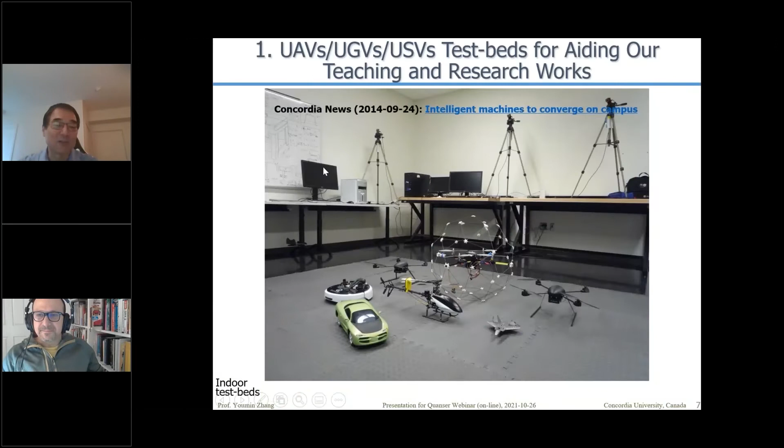Thanks for the opportunity for this webinar to share our work with the cutting edge platform supported by Quanser for many years since I joined Concordia in the beginning of 2007. The idea today is to show what we have done through this cutting edge platform for helping or aiding the teaching and research work carried out by our group, and I really appreciate the great support from the Quanser team for many years of support.

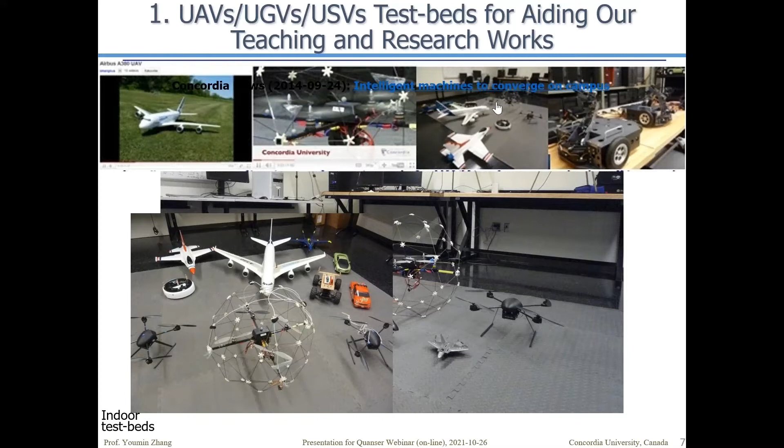We have had these since the birth of the QBall, QBot and UGV. And now we also have the QDrones, different platforms in our research lab, including the MicroPilot MP2128 autopilot. We try to make use of all these cutting-edge platforms to help us do cutting-edge research, hopefully.

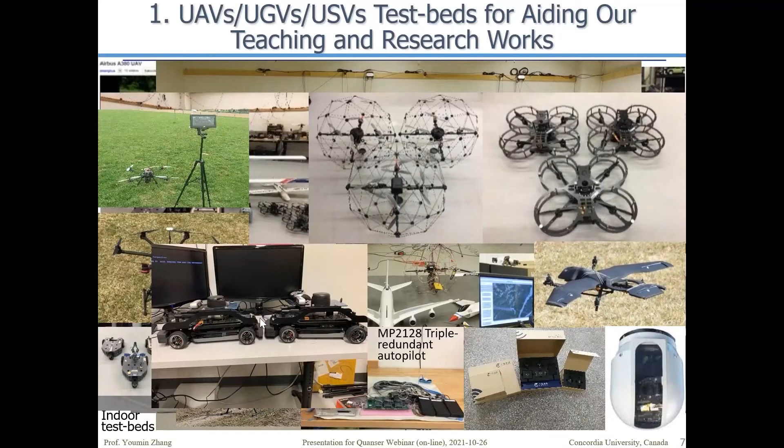This is the latest one from Quanser, called QCar. We have two, thanks to Quanser, and use this cutting-edge platform for research currently. Here is also our outdoor test bed, the DJI M300 with onboard cameras, including color cameras and infrared cameras. We are trying to use this for forest fire monitoring applications.

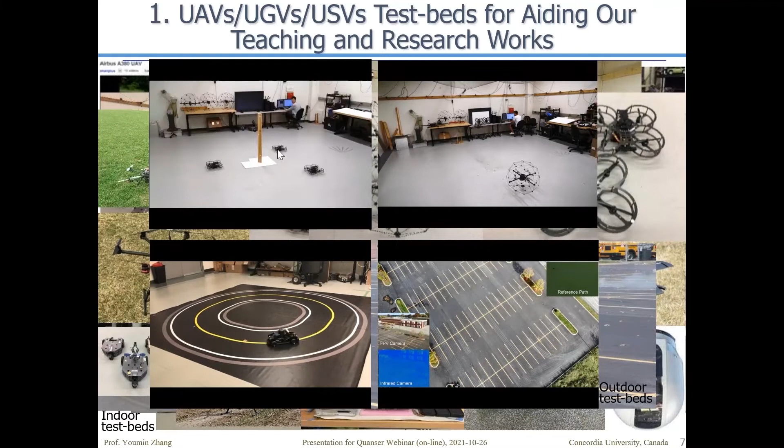For a quick view, I'll show some videos of what we have done recently, to give a rough view of how we use this cutting-edge platform to help us do research on applications for forest fire monitoring. As you can see in the upper one, we have the QBall, the QDrone, and the QCar.

This is the application with the M300, Matrice 300, with onboard sensors, mimicking fire detection, which includes both the motion control and the image processing, using the latest deep learning methods and AI techniques to help us achieve that goal.

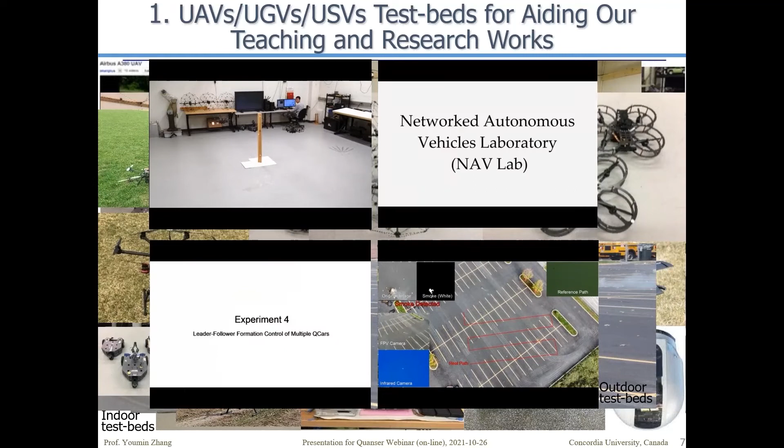You can see these testing scenarios, where we use all these technical platforms. We have three QBalls, and on the floor you can also see the UGV, so there are different platforms available. We currently also use this for leader-follower multiple vehicle formation control applications in general.

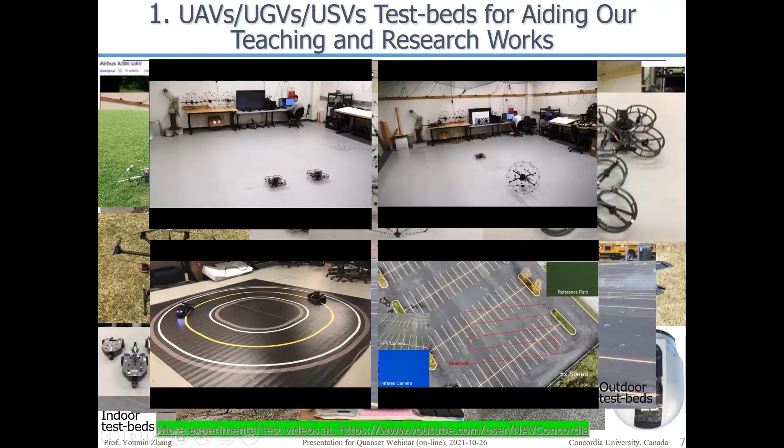And so just to show quickly, for these scenarios that I showed we have done. But anyway, if you're interested in more testing scenarios, you can come to this website, which we call the NAV Lab for Concordia, the Networked Autonomous Vehicle Laboratory in Concordia. Actually, we have all these videos uploaded for more than 10 years. As you can see, the first one we uploaded more than 10 years ago, with this test platform initially from Qbot, to try to implement different strategies for this fault-tolerant control algorithm behind.

So there are more videos. Once we have done videos, we upload them on this YouTube channel. If you're interested, you can watch all these videos. Probably I do not have time to show all these videos here. So maybe I can show these videos here. As you can see, yeah. Probably you cannot hear the voice, but anyway.

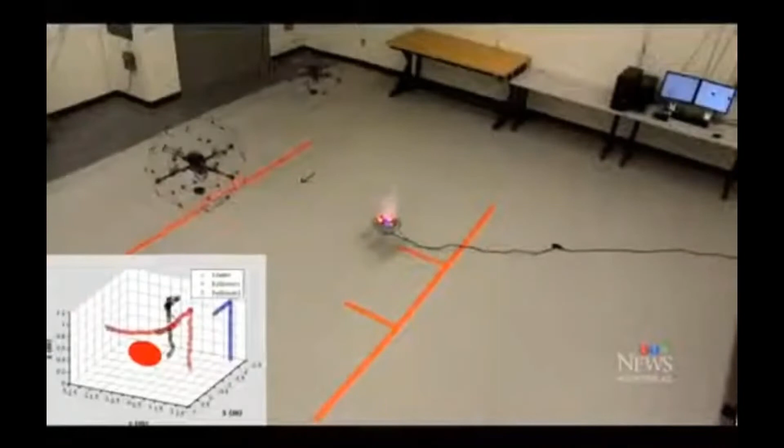Older methods of detecting fires, including having people in towers or on foot, can result in errors. People may misjudge the exact location of a fire. Drones don't make those kinds of mistakes. Drones can also be used to monitor pipelines and power lines, or for search and rescue. Hossein says his work with drones and image processing comes with a unique set of difficulties. Fire isn't like other objects that you can easily detect. It doesn't have a fixed shape. It doesn't have a fixed size. It can be small. Even the color of the flame changes a lot. One of the bigger challenges is detecting smoke, because smoke can be white, it can be black, and if it's far away, it can blend into the background. Smoke may be the first signature that we see of a fire. The flame could be hidden in the forest.

Climate change is making this research more important every year. Scientists say over and over again, because of climate change and everything, it's only going to increase. What I'm doing can save lives, it can help save the environment. Scott Brooks, CTV News.

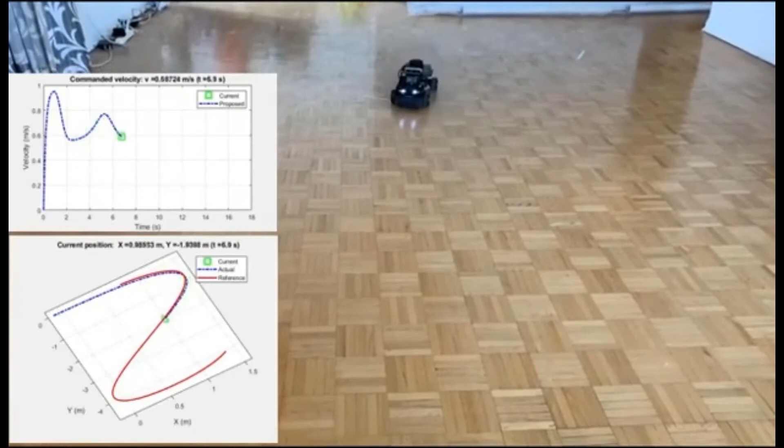Okay, I just show this as an example, but as I mentioned earlier, there are more videos and testing results available on this website. But also I want to show maybe this one, which also uses the latest QCar as the test bed for carrying out this autonomous control. Because of the pandemic, even though we received this QCar, the student had to do the experimental testing in his apartment. Because of this experimental testing result, with the algorithm implemented using these cutting-edge QCars, we finally have one paper published in the IEEE/ASME Transactions on Mechatronics.

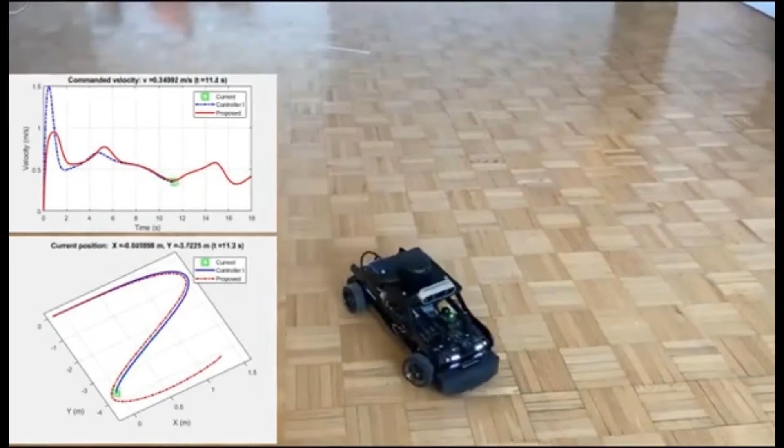Mechatronics. So from the information I can see, it is the first one that makes use of QCars for the testing scenarios published in this IEEE Transactions journal. So anyway, we are still trying to make more and better use of these cutting-edge autonomous cars from Quanser.

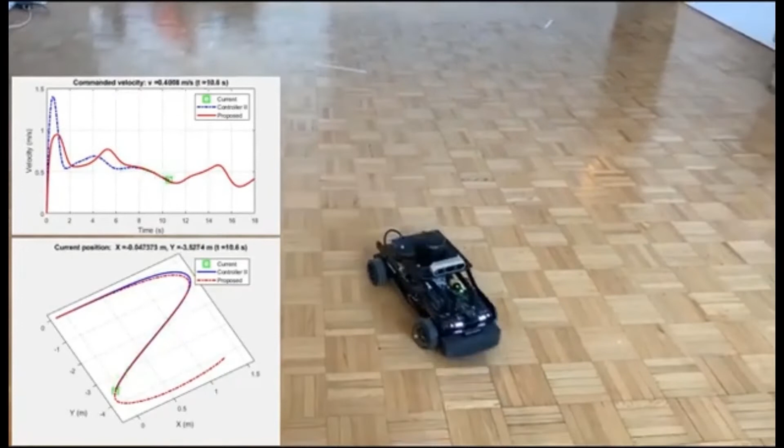So we try to test in the different scenarios for the single QCar and for multiple QCars, for the autonomous control, and hopefully also for fault-tolerant control implementations. There are more videos available here, but due to time limitations, I will not show all this. We are currently working on more applications to be achieved based on this cutting-edge test bed or platform. Anyway, I have more slides to show all this.

We also modified this from a helicopter to an octocopter. So basically we try to use this for mimicking, the simulation of damages during the flight, then try to implement what we call a fault-tolerant control algorithm behind.

Also, earlier, we had one CTV News interview at the university. I may show this video because we use this for teaching purposes at the university, for control system teaching and also for fault-tolerant control teaching. This kind of helicopter is for teaching purposes for the flight control system course and the fault-tolerant control system course.

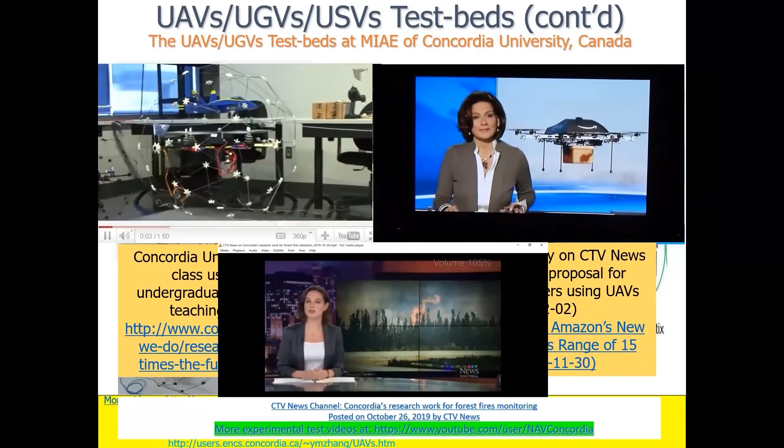In this lab, we have two QBalls. We use them for research and we go through many scenarios and very deep theory for fault-tolerant control systems. Sometimes you like to evaluate some models. We like to fly with a joystick and to see how the real system is. This is my earlier stage of the smaller lab. So let me move to the larger lab.

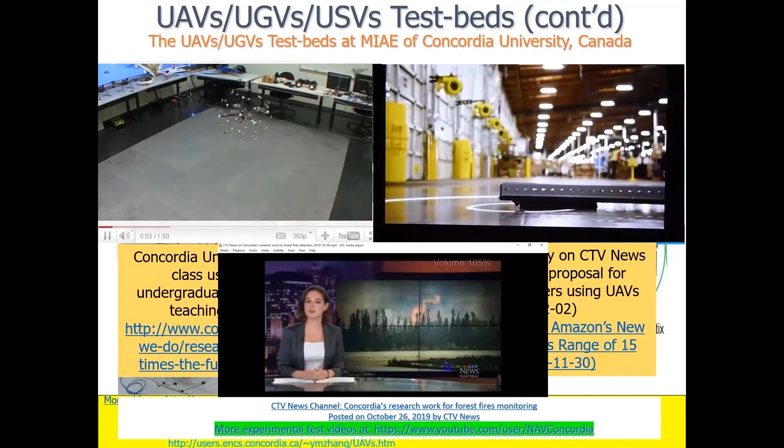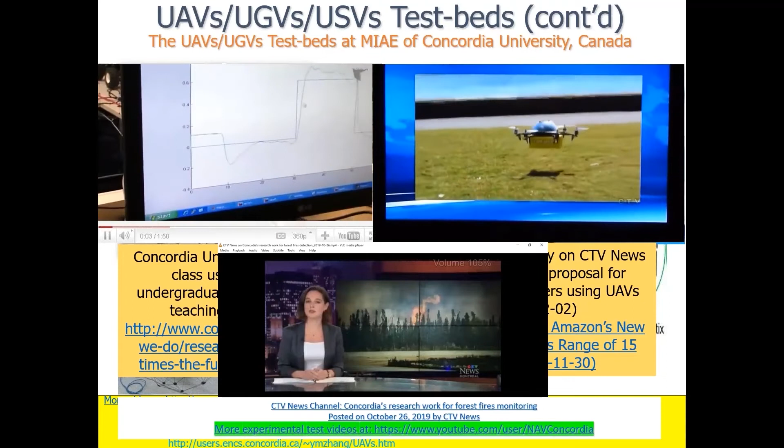Damage, like splitting of the propeller. Then we can get the information about the saturation of the PWM signal. And this is the QBall in my teaching lab. You can see the plots: the blue line is the trajectory we gave to the QBall, and the green line is the real position of the QBall, which tracks the trajectory.

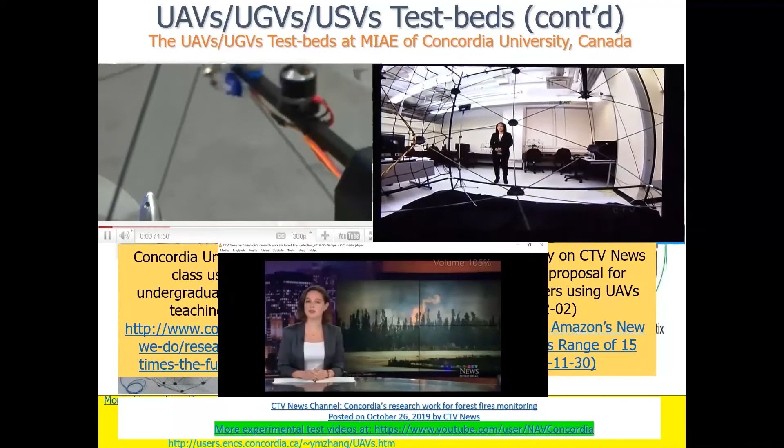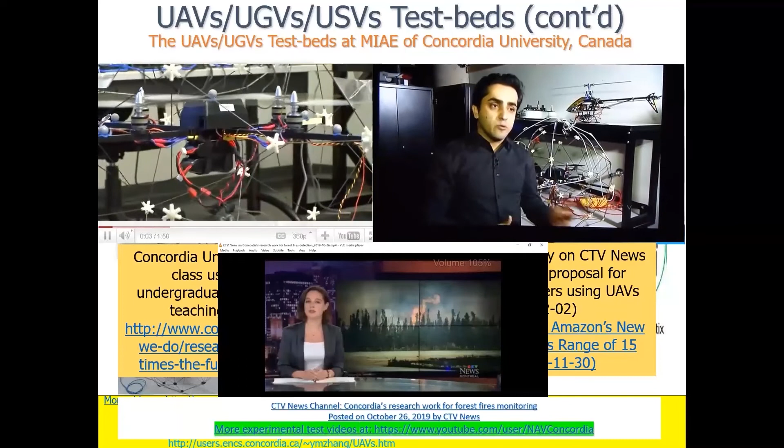Most of the students see slides, they see the theory of flight, and they just hear some names like roll, pitch, and yaw. But when they come to the lab and they get familiar with the theory of control, they see something is moving, and all that knowledge on paper or on computer is now going to be in real time. They get more ambitious, take more courses related to this area, and continue to work.

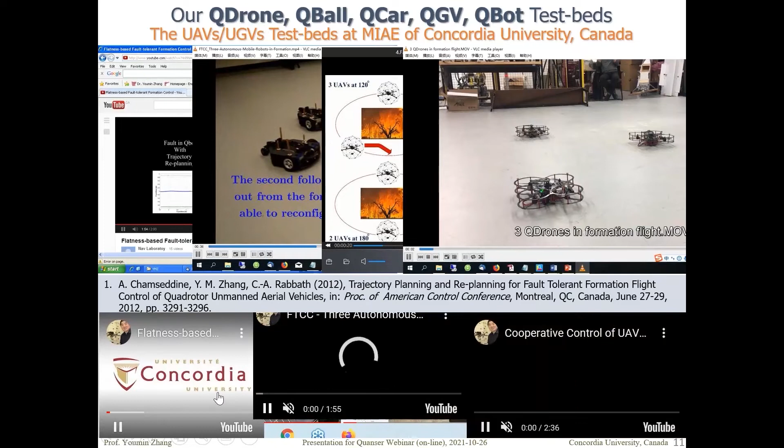Okay, I just showed these videos made by the university quickly, and also the CTV News interviews, the earlier stage and also the later one. But due to the time limitation, I'll not go through more details. As you can see, we also try to develop all the platforms in the research lab with publications. We also have testing results making use of this earlier stage of the QBot and also the QBall.

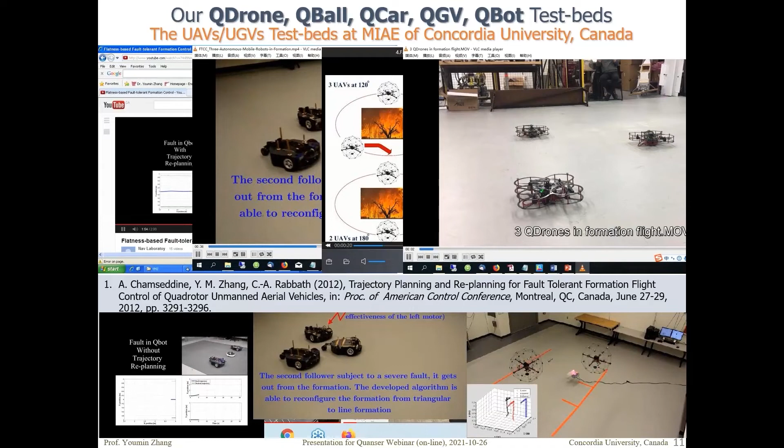For the testing scenarios, we implement different strategies in terms of what we call fault-tolerant control and fault-tolerant cooperative control, and also applications to fire application scenarios. I just muted the voice so you can see the motions behind. The idea is to make use of this cutting-edge platform for testing the different strategies in terms of overall motion control, and also towards different applications in the indoor environment.

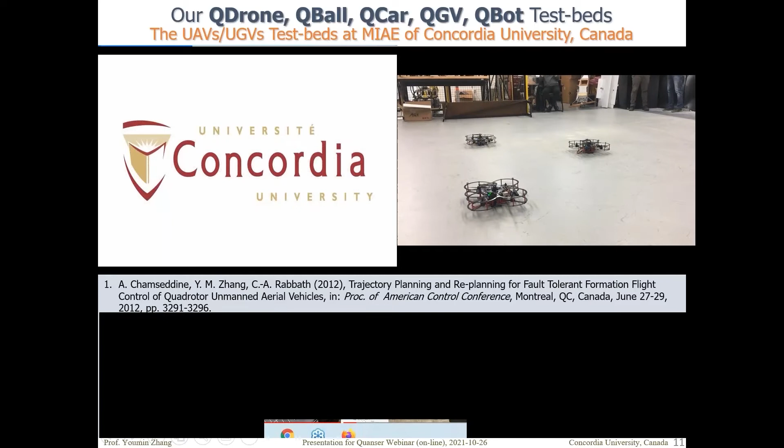We also try to mimic what if a fire occurred, then we try to do the detection and continuous monitoring and even prediction for the future evolution of the forest fire. So we try to work on more application areas. As you can see, this is the first time we implemented the 3 QDrones in the lab.

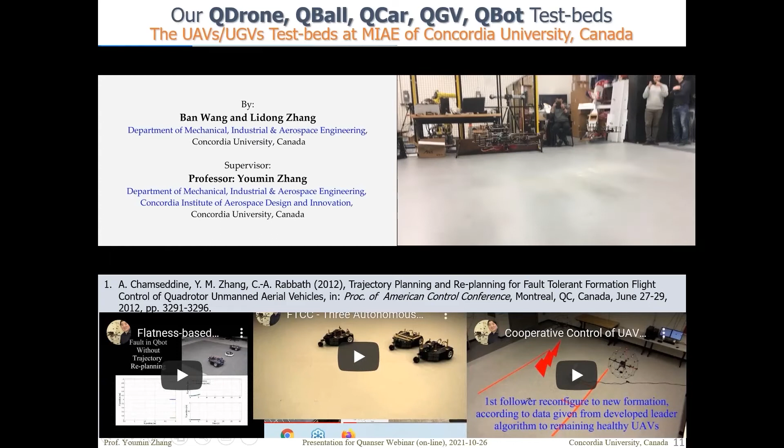As you can see, we also try to apply the second generation of QDrones and the first generation of QBots together, and you can see the layout in the lab. As you can see, there's someone sitting behind, actually Oliver from Quanser support, and we also put up the videos because that was the first time we tested these QDrones, about 3 years ago.

So we try to make use of this for research and for teaching applications. But due to time limitation, I will just stop here for these videos.

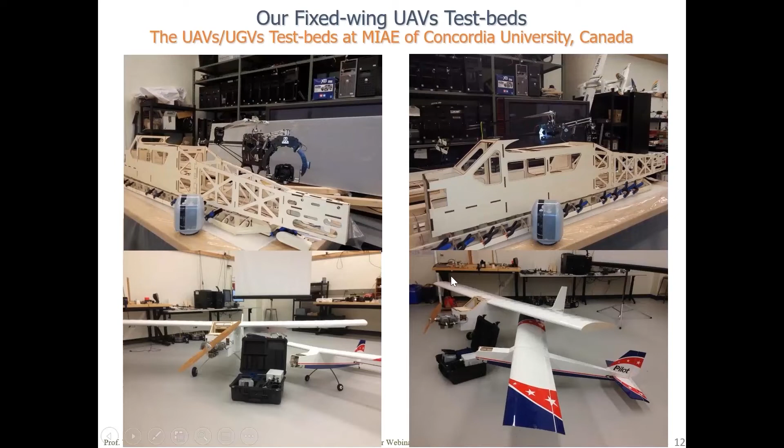Some videos are available on the website. We also developed our own for the fixed wing, from scratch, with these powerful gimbals, and did the outdoor flight testing in a nearby location to Montreal. So we try to use that in general for our monitoring applications.

So that is just an overview of the platforms available. We really appreciate the great support from Quanser and also other companies.

Until now we still use these flyable fault-tolerant helicopters, thanks to Quanser's strong support. Then we are able to let the students, undergraduate students particularly, make use of the cutting-edge platform for understanding the concepts of modeling and control analysis of this kind of aerial vehicle, particularly using the quadrotor helicopters during the six labs. The lab manual describes all the details, including the vision system, the dynamics, and the control strategies for controlling the QBalls, which we have used since 2010, more than 10 years until now.

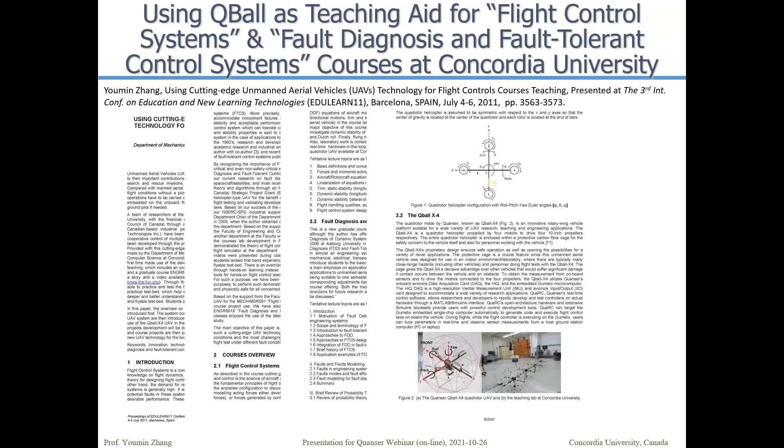Basically, it introduces the ideas and how we have used this cutting-edge platform for course teaching, particularly for undergraduate students. That's also why the university put together professional videos introducing the use of cutting-edge platforms, particularly unmanned systems, in course teaching, which helps a lot for students to have a good understanding of the concepts covered in the course. So now I move to the research aspect.

This just shows the applications, more generally, in case you want to know a little about the future applications and the challenges of using unmanned systems in the air, in space, on land, on the surface of water, or under the water. So how to make these unmanned systems smarter, safer, more reliable, and more resilient for different applications. We are trying to use these platforms towards autonomous and safe operations of all these different types of platforms.

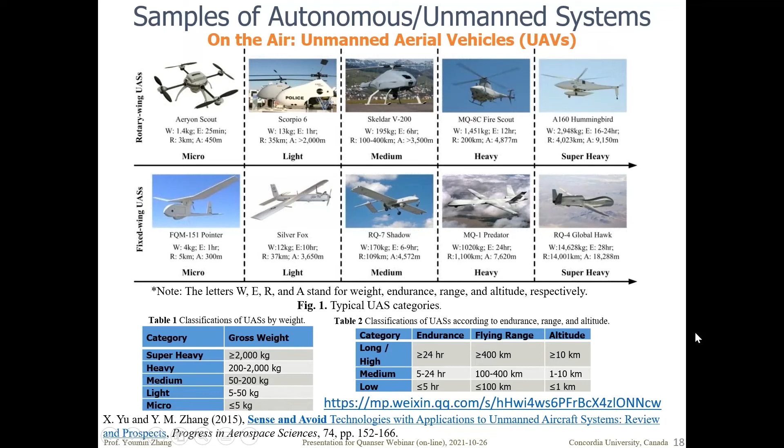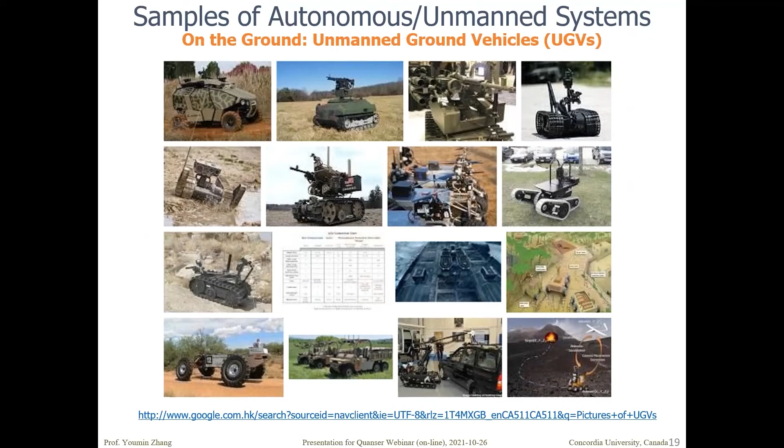Also, if you're interested, you can see the papers we published. This is the paper published in 2015 in Progress in Aerospace Sciences, which also has onboard sensor information, because we also work with companies on this application. I'll go quickly, just for a view of what we call unmanned systems, UAVs or drones, and UGVs for different scenarios, like autonomous cars. So there are a lot more opportunities for future commercialization.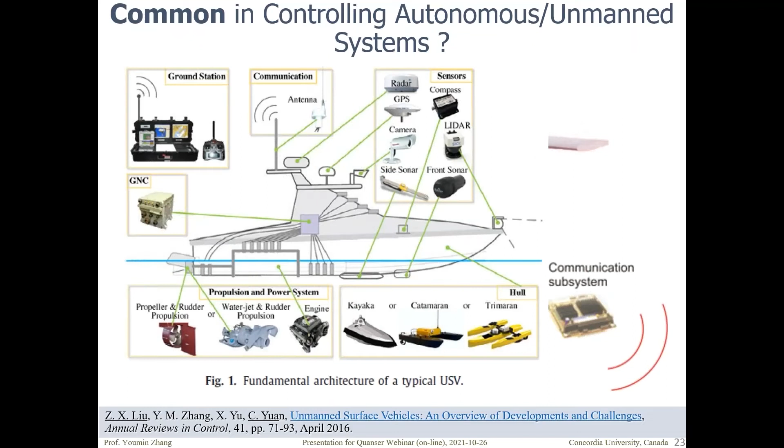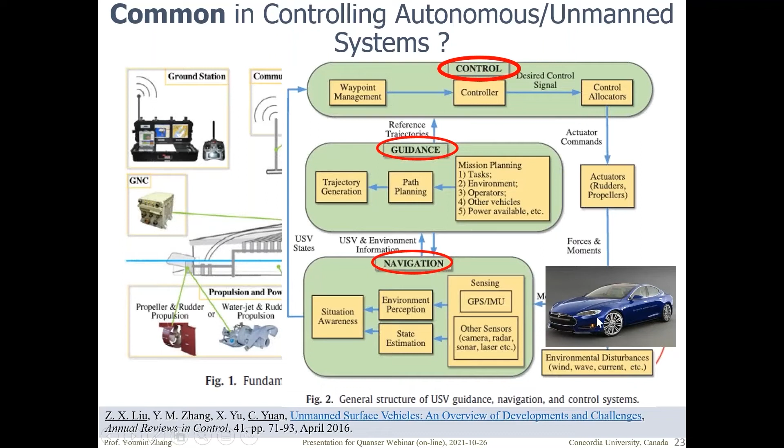So we have these different types of unmanned systems. What is general for making good use or good control of these different vehicles? If you look from a control point of view, we have three keywords: guidance, navigation, and control, no matter what kind of platform we have in space, in the air, on the ground, or on the water, and for different applications. But these three keywords concern general normal operating conditions.

Then what if, during operation, a fault occurs in the actuators, sensors, or some part of the system? How do we make the system safe and reliable as if in normal operation? This is the subject of what we call fault-tolerant control. So we try to make unmanned systems in general smarter, safer, and more reliable. More reliable basically in terms of what happens if physical faults occur in the sensors, actuators, or other components of the system; then we try to make the system safe. This is the subject of fault-tolerant control. But more resilient is also a really relevant new subject in terms of control.

So we basically consider, due to these communications and internet connections, wireless communications, if unfortunately some cyber attack occurred, how can we still guarantee the safety and also the security? It is a relatively new subject. And how about this combination of physical faults together with cyber attacks? That's also the four keywords: smarter, safer, more reliable, more resilient.

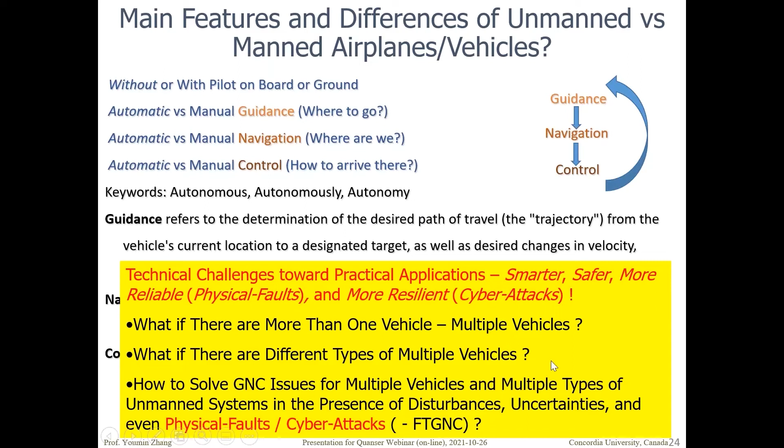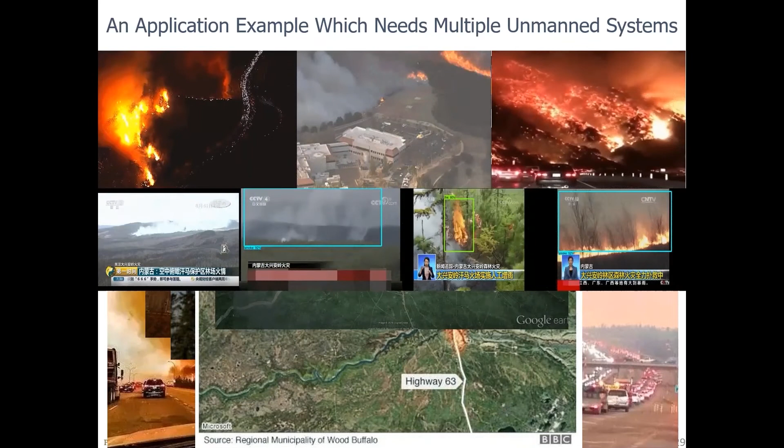For single vehicles, for multiple vehicles, for different vehicles with collaborations, it is still really challenging in the current state of the research field, with more work needed towards these different applications. Actually, generally, this is just a different application I want to show here. I'll go very quickly through the different scenarios. I think we still have a lot of work, a lot of opportunities for carrying out more advanced control strategies, even together with image processing technologies.

As in these typical examples of forest fire monitoring applications, which include both motion control and image processing, we can use AI or deep learning methods for both parts, the image processing part and the motion control part. So, as you can see here, I try to summarize the challenging issues towards these applications. Sensors on board is one, and also the intelligence, and also from a research group aspect.

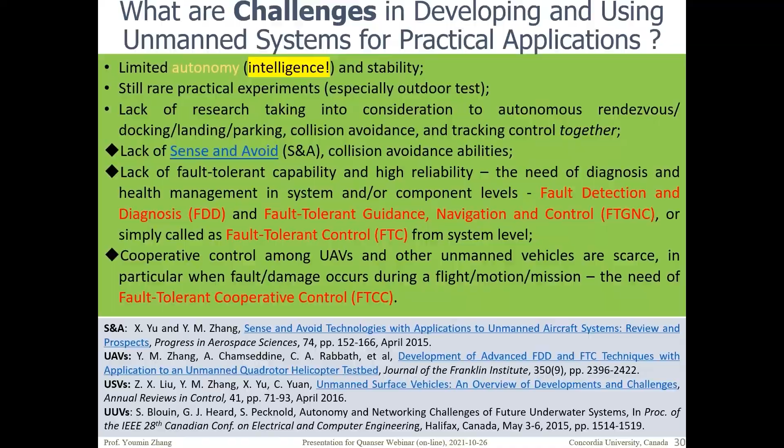So we work on what we call fault detection and diagnosis, abbreviated FDD, and fault-tolerant guidance, navigation, and control. We can simply see that as a control issue, simplified as FTC. So we have the keywords FDD, FTC, and for multiple vehicles we have what's called FTCC. That should deliver the ideas I want to deliver from today's talk, related to the keywords of applications, in particular for fire monitoring applications.

There is also fire detection, fire diagnosis, fire prognosis. What if we have different types of unmanned systems working together to provide faster, reliable, precise solutions? Then we have to solve both issues, the motion control and the detection of fires, also with other monitoring applications for power lines or whatever natural disaster.

So this paper is related to the first paper I mentioned, the review paper, which will be published in the next issue of the Chinese Journal of Aeronautics. Basically we use fire monitoring applications as a background, then consider what if a physical fault occurred and a cyber attack occurred. Then we still have a lot of work. It's really the cutting-edge research subject from my understanding.

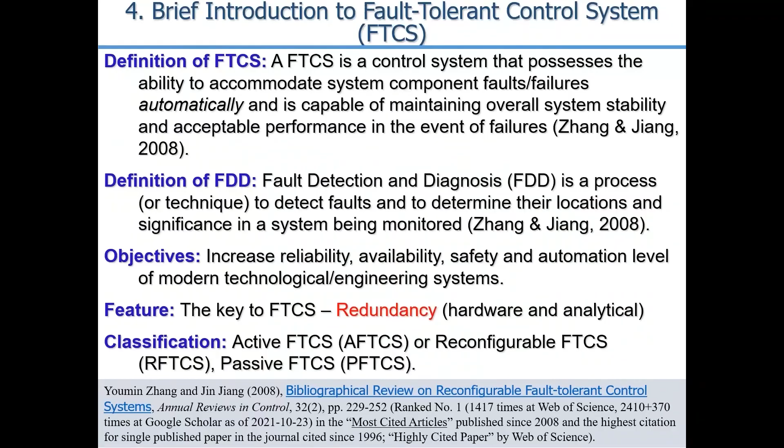Anyway, this just gives the rough definitions of what we mean by fault-tolerant control applications. Some videos I will not have time to show. Probably you can watch them from the website I pointed out earlier.

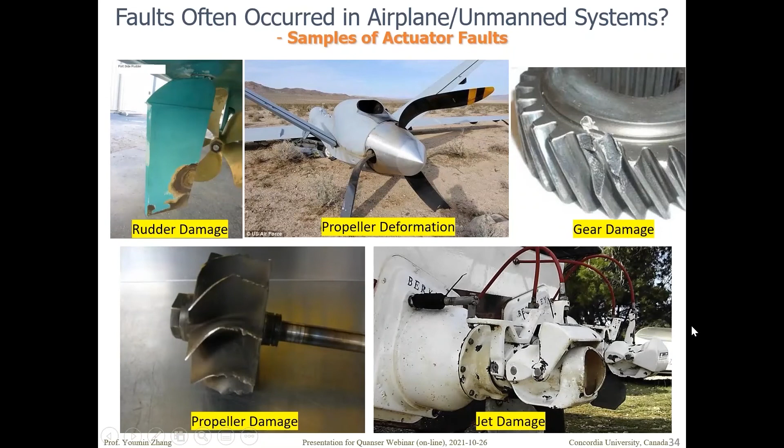So when we talk about a fault-tolerant control system, basically it is a control system. The idea is we try to design a controller we call a reliable controller, or now a passive fault-tolerant controller, or treated as a system, a passive fault-tolerant control system, to guarantee safety and acceptable performance in the presence of different faults occurring in the actuators, the sensors, and subsystems in general. We try to achieve the requirements of stability and performance in the presence of faults.

We call this a fault-tolerant control system, and it's so-called passive in the sense that we design one controller to cover all situations, normal and faulty, but it's a challenge. It's simple, but it can probably only handle small-magnitude faults. What if I have a severe fault situation? Then we have to add more functions, what we call here the FDD part, for detection and diagnosis.

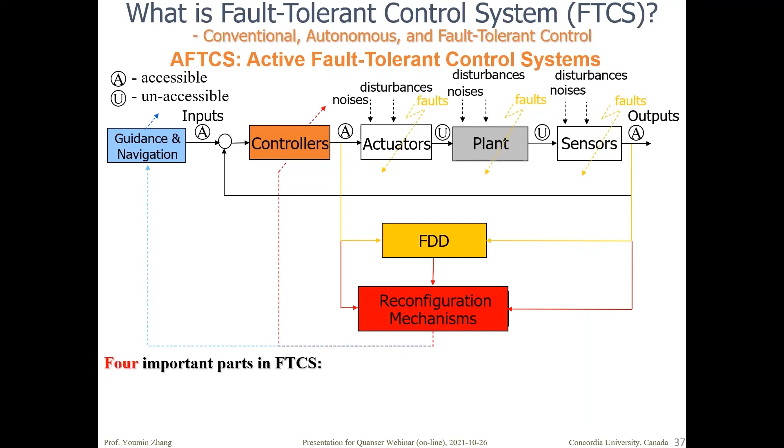Together with the controller reconfiguration part, we design control strategies we call active fault-tolerant control. Active in the sense that we detect and reconfigure the system actively, trying to figure out what fault occurred in the actuators, sensors, and subsystems. Then we try to still maintain the stability and the performance.

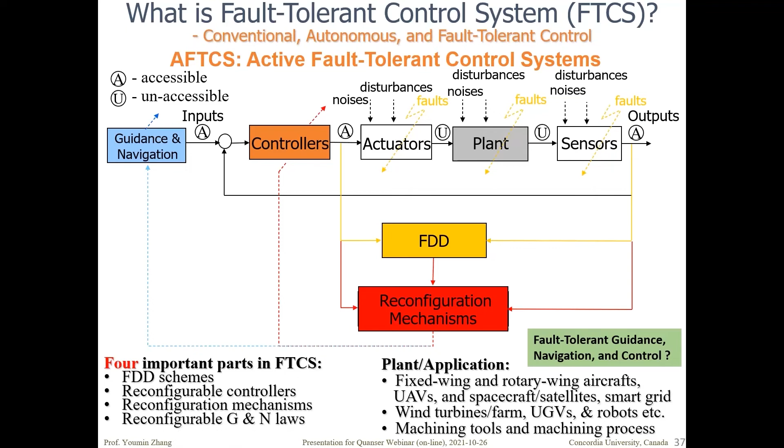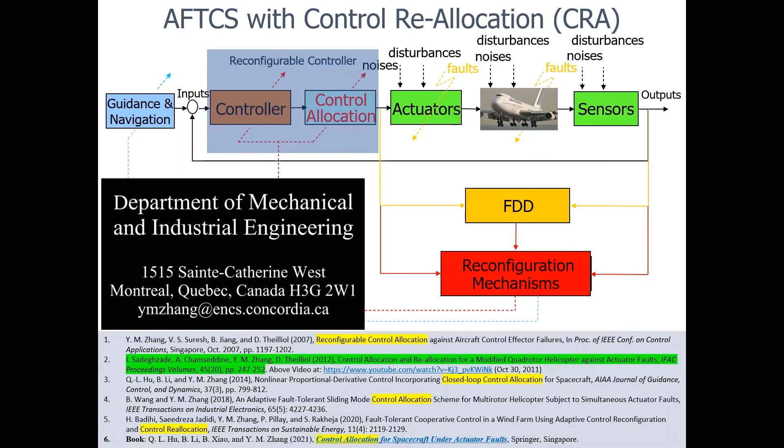This should also extend to what if a cyber attack occurred. It's still a very challenging subject in this field. Let me show some videos of what we implemented. One of the control strategies is what we call control reallocation, trying to make use of the quadrotor helicopter, but modified to an octocopter with 8 propellers.

I won't show more of this video due to time limitation, but you can watch it on the website. In the scenario where we don't implement the FTC algorithm, due to a large amount of fault occurrence in the propeller, we lose control of the helicopter. When we implement even a simple FTC algorithm based on control reallocation, we can finally stabilize the helicopter and have a safe landing. You can see the physical damage made during flight—even losing one propeller, we're still able to maintain stability and have a safe landing.

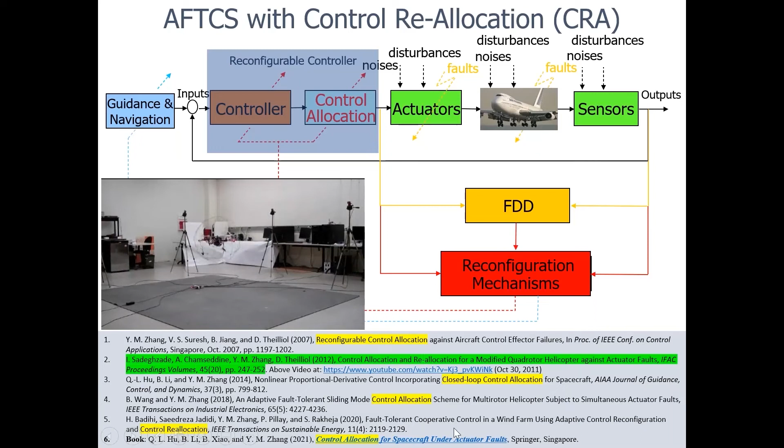The concept behind this is shown in this block diagram. If you're interested in the work, you can read the paper we published earlier, which you can also find in my publication list.

These are some of the challenges I summarized in an earlier review paper we published in 2008. It's one of the widely cited papers in Annual Reviews in Control. Of course, safety and fault-tolerance issues are among the hardest subjects for further research and development toward real applications of unmanned systems. There are still more challenging issues as shown here.

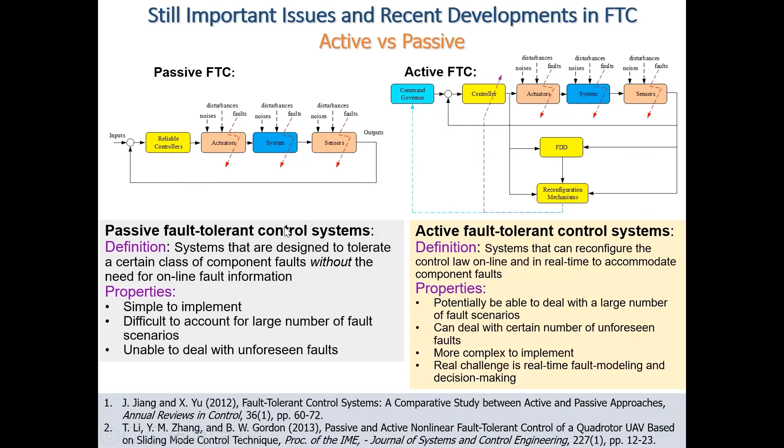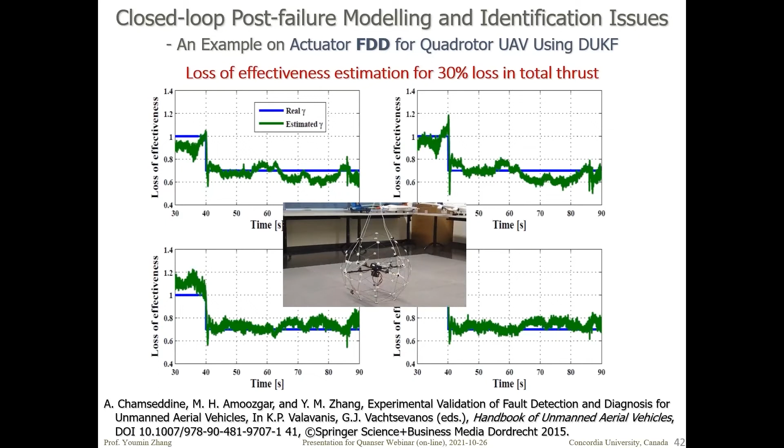Due to time limitation I won't mention more details, but we need to make use of hardware redundancies together with FTC algorithms—basically by making use of analytical redundancy, implemented in a passive or active way, to achieve stability and acceptable performance, along with online parameter estimation or system identification to find the post-failure model. This is all challenging work, but it is possible, as shown in these different papers and current work already done.

Now let me give a brief introduction to multiple vehicles, what we call FTCC. Previously we mainly focused on single vehicles, what we call FTC. For multiple vehicles, communication naturally involves, and navigation and coordination strategies must be implemented in the multiple unmanned system as a whole. We could have drones in the air, UGVs on the ground, USVs, and also satellites together, which makes it somewhat challenging work in general.

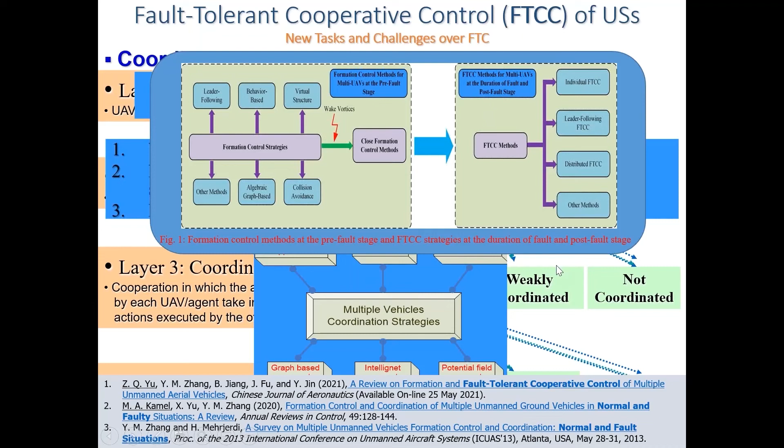As we showed in this review paper, there's still more work to do currently, particularly regarding cyber attacks, which still need more work in general.

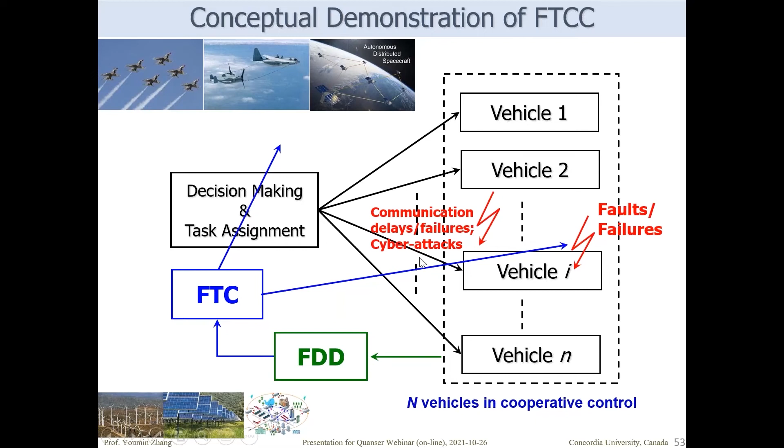The overall concept and principle behind FTCC is still related to two fundamental functions, similar to single vehicles but with different strategies and problem formulations—what we call FDD and FTC. But overall, because we involve multiple vehicles, even different types, in terms of physical faults in sensors, actuators, communication links, and cyber attacks, how we can still maintain stability and good control of the multiple vehicles remains challenging work. This is shown in this review paper.

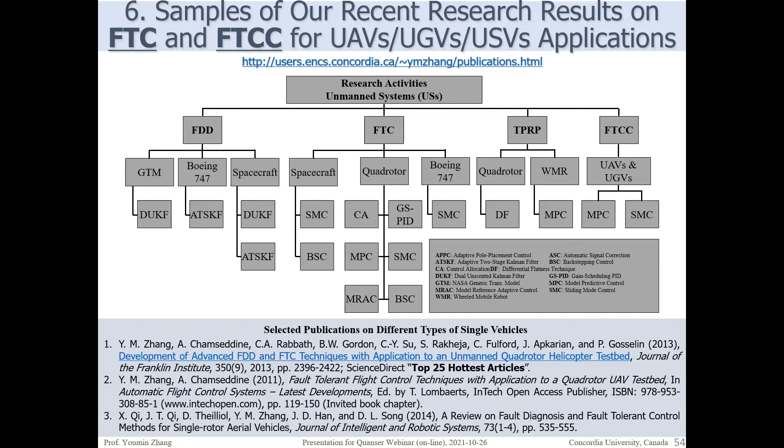If you're interested, you can download it from this journal. Overall, we work on different algorithms with different platforms, covering FDD, FTC, and FTCC, using model-based methods and neural net-based methods for linear or nonlinear models, with different control strategies.

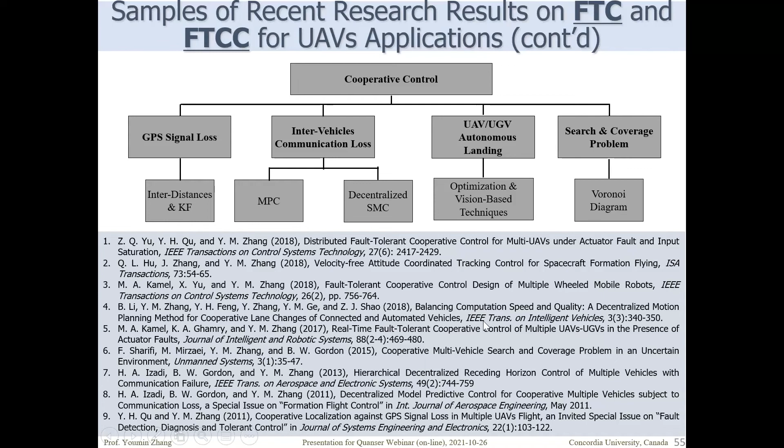For the different scenarios, if you're interested, you can read from the papers published earlier. Some videos here I already showed as earlier work we have done, but currently we still try to use more of this platform for testing different scenarios in our work. More information can be found from these videos and the publications on the website.

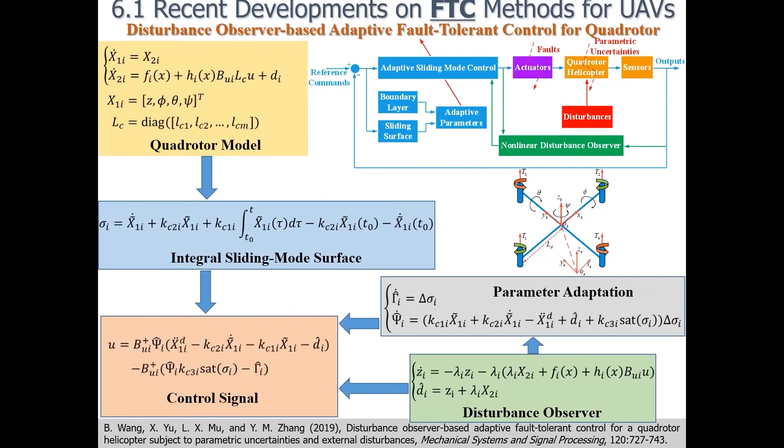The rest of the slides just show quickly our recent development for this quadrotor helicopter implemented to the QDrones. As you can see, the strategy is implemented based on disturbance observer-based strategies, using sliding mode control with the observer to estimate the magnitude of the fault occurred in the quadrotor helicopter, trying to maintain the stability. This is still based on simulation.

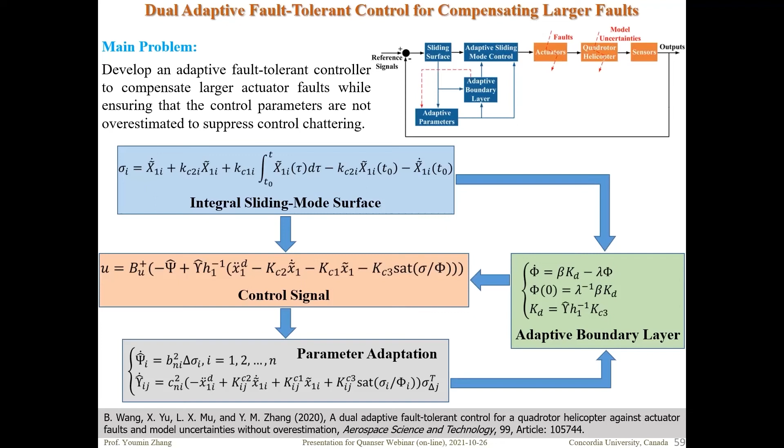We have two approaches to talk about mimicking that dynamics of obstacle avoidance.

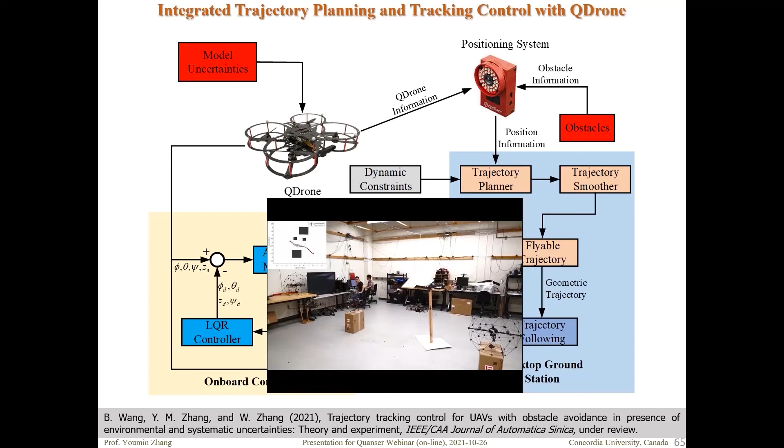Due to time limitation, I'll just stop the video show here.

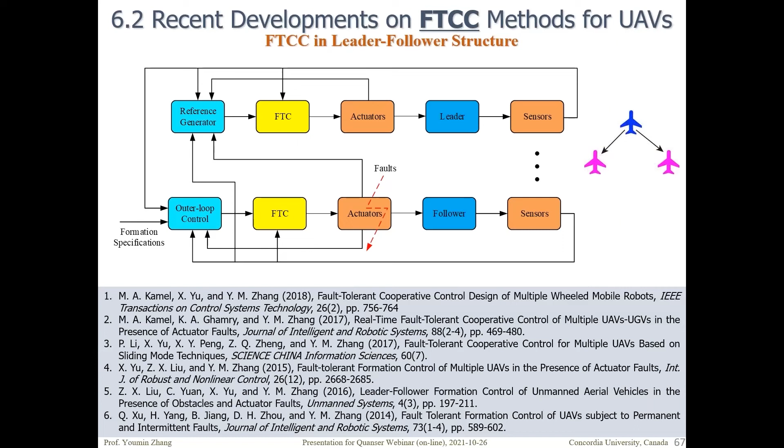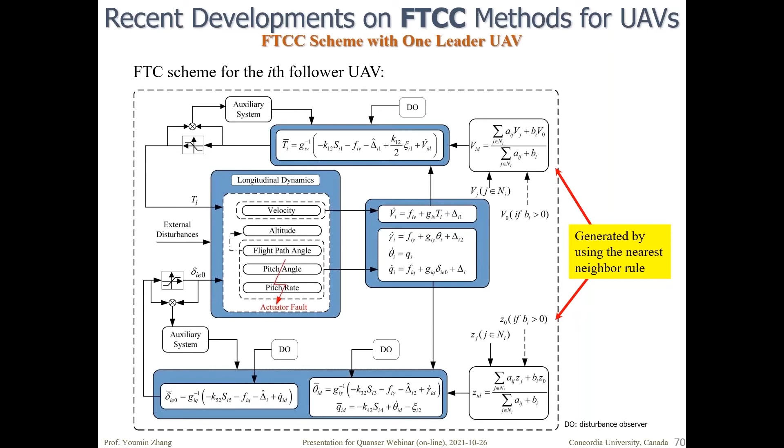So that covers some work for single ones and multiple ones. We also work more on the multiple ones, but it's still in the simulation stage, testing different strategies behind leader-follower strategies with distributed communication structures. We published some papers in recent years in journals like IEEE Transactions on Neural Networks and Learning Systems, Cybernetics, with different methodologies to mimic different scenarios and constrained situations for single or multiple leaders.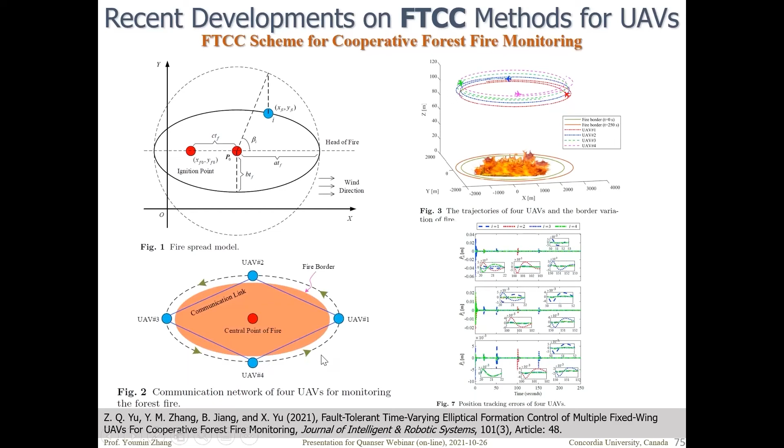Also try to use this for forest fire monitoring, smart safety observations, this scenario, mainly based on Dr. Zhiquan Yu's PhD thesis work, and he's currently working at Nanjing University of Aeronautics and Astronautics. My student also worked on this forest fire monitoring application, using deep learning methods for both motion control and image processing.

We implemented different scenarios, as you can see, I have many videos here shown quickly. This also mimics some simulation environments. Due to the pandemic, my student also made this kind of indoor test scenario for testing these different strategies for both image processing and motion control, with this 3D view and simulation environment for the different applications they have.

This latest one is for the M300 testing we did recently, for real-time onboard detection with an onboard computer which we started on the M300. You can see real-time planning and detections for smoke and flames as they occur. But this is still just preliminary testing with this latest platform available in Europe. As you can see, we have color imaging and an infrared camera with the detection algorithm implemented using UNet.

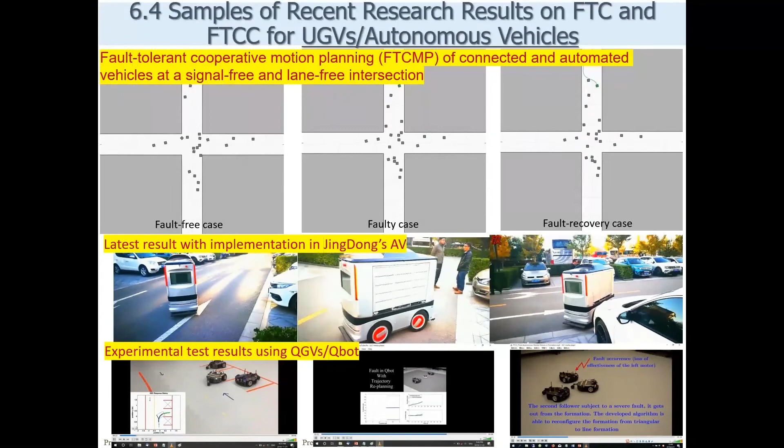UNet. So anyway, I'll stop here for more questions. Now, this result we use on ground vehicles. We also have these scenarios with the UGVs, also from Quanser, and probably not many research groups have this platform. But the latest one is what I showed earlier for this QCar. So we have different testing results earlier for all these different scenarios. Let me just show these videos quickly.

So with the different test scenarios we implemented, but with of course different algorithms in all this explanation and implementation. This work actually is from Professor Ali in Hunan University, also using QBot for doing the testing. So as you can see from this one, this is what we implemented here at Concordia.

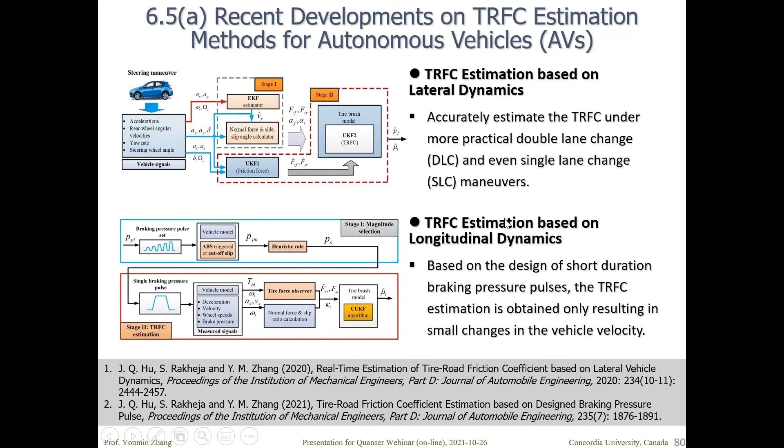For this QGV, basically we also implemented different tracking: static, dynamic, obstacle avoidance, and also what we mentioned earlier, the FTCC algorithm behind it. So with this different testbed for validation and testing different strategies. Here you see a paper I mentioned earlier for publication, even with friction estimation for autonomous vehicle applications and also the control parts. We use the QCar for this implementation.

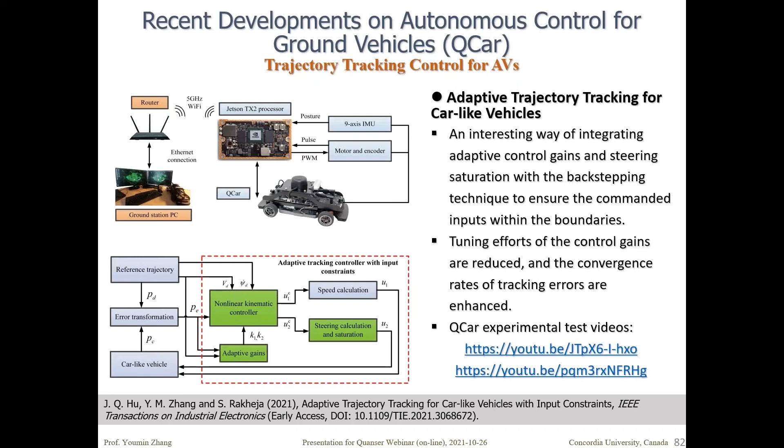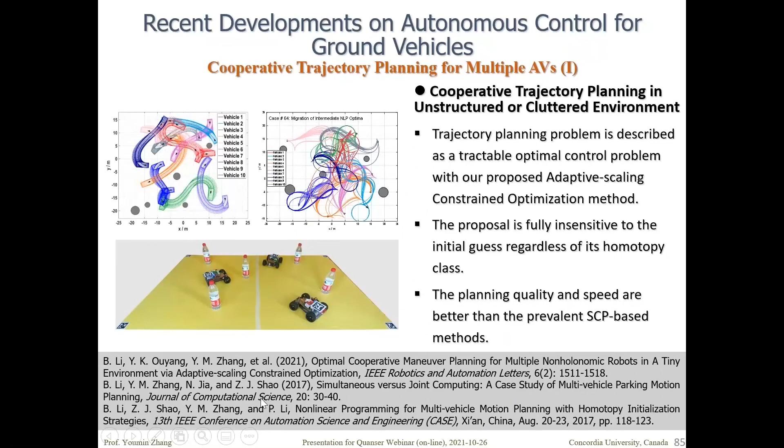That is the paper I mentioned earlier for TIE. It is available online, but not officially published in paper format yet. So like also with different applications, different works from the QCar platform, autonomous car applications. We also have simulations for different scenarios with multiple mobile robots for all these different applications, as you can see here, and you can see that paper we published, listed in the publication list with different scenarios.

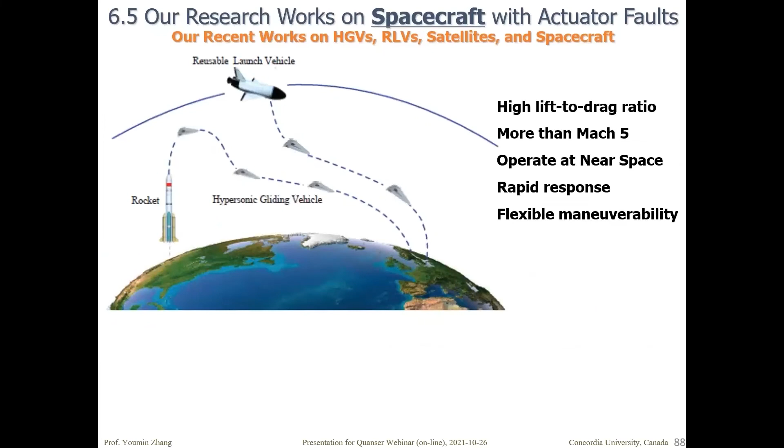So we also work on spacecraft in general, but focus on actuator faults with different platforms. Of course, we do not have a real platform, it's so challenging to have this hardware platform. But anyway, we collaborated with the Canadian Space Agency some time ago with formation of two satellites - the hardware is from the Canadian Space Agency for the FTD part of work for the formation scenarios. That is one of the earlier works.

We work on wind turbines, although we are focused on unmanned systems, but we also treat multiple wind turbines and solar panels as part of the unmanned system in general for generation of electricity. So we also work on FTD, FTC, and FTCC with different algorithms, using even fuzzy logic for the implementation. We also use the FTCC concept applied to wind turbines. We published this in Applied Energy, I think the first time in 2017.

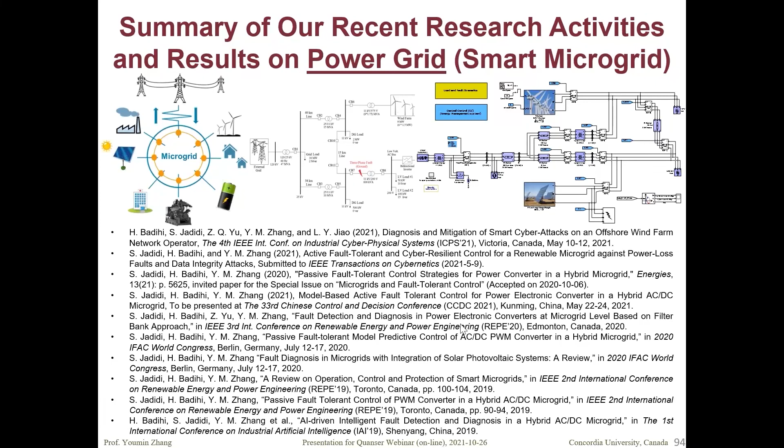So we tried to build a benchmark model to mimic physical failures and also cyber attacks, with publications. We still work on that, but currently due to lack of hardware platform, hopefully we'll get a chance later on with a hardware platform. So we are doing this simulation benchmark, basically treating the MATLAB simulation environment to mimic physical failures and cyber attacks in the framework of microgrids, then trying to develop different control strategies for achieving safer, reliable, and resilient unmanned systems in general.

So overall, that quickly gives the works we have done, based mainly on the strong support from Quanser, all these different cutting-edge platforms on the ground and in the air. So basically also testing different strategies in terms of motion control and image processing, particularly focused on FTD, FTC, and FTCC works.